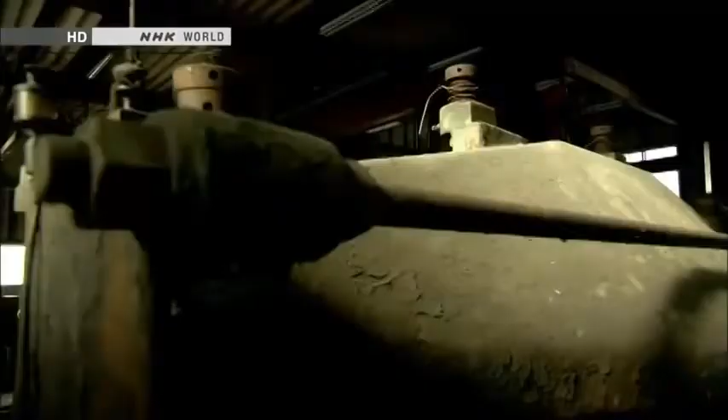In a workshop near Mount Fuji, a curious being has appeared. It's 3.8 meters tall and weighs 4 tons. It is a giant humanoid robot named Kuratas.

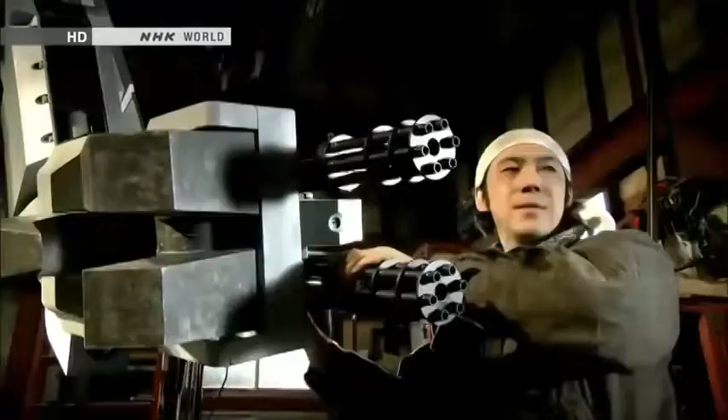Kuratas is a contemporary artist's creation. He holed up here for 2 years, building the robot with input from an expert.

He calls Kuratas a work of art, but it's a sophisticated piece of machinery. A person seated inside can control the robot, move its limbs, and grab things.

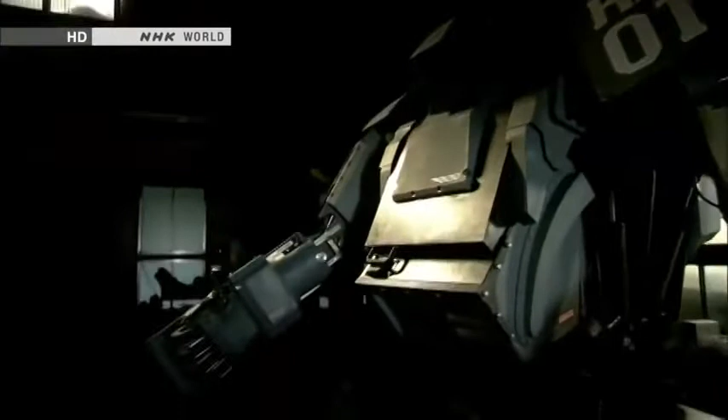The artist says he was inspired by robots in science fiction tales and animation. That vision sustained him as he worked in solitude.

Things that were once unthinkable are becoming real. How will robots evolve? Well, military applications could be one option. They'll probably become more and more like humans. They could surpass us in strength and ability.

People long dreamed of creating these extreme machines. Now, humanoid robots are here.

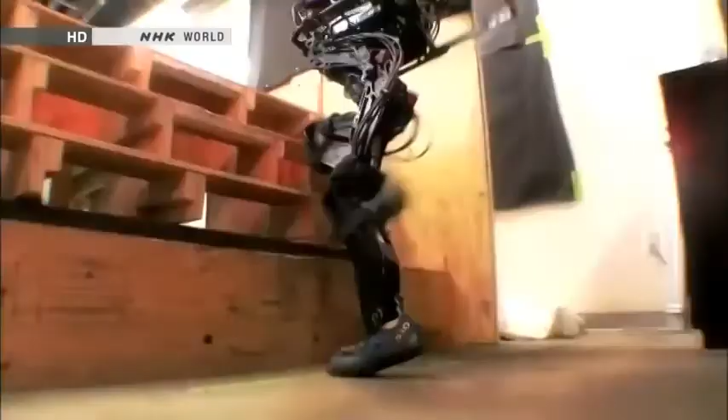They think like we do, move like we do, and even sacrifice themselves for us. We want our robot to change society, because robots must be useful.

Electronics and computing, progress in vision systems—there are many pieces of it. We will see much more capability continue to grow.

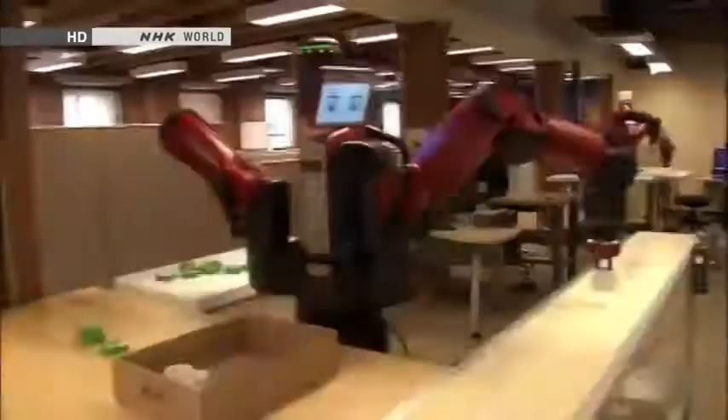Since the Industrial Revolution, people have entrusted some jobs to machines. But there may come a day when humanoid robots do much more complex jobs. Then, what will people do?

You'll see more and more robots doing things in society, whether it's manufacturing, service applications, or home healthcare applications. The key will be to skillfully divide labor between humans and humanoid robots.

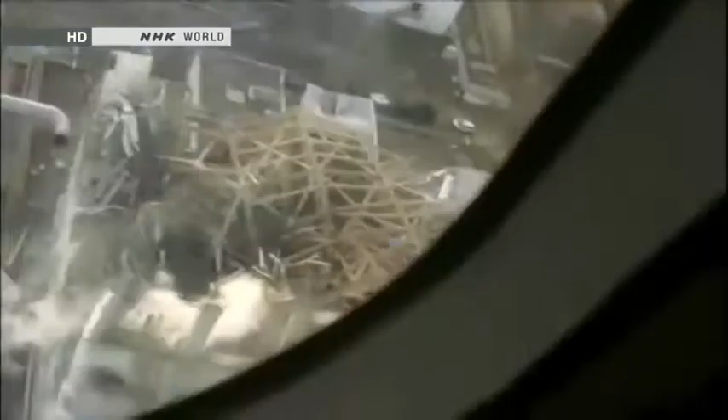The disaster that hit Japan in March 2011 accelerated efforts to develop robots with human traits. The Fukushima nuclear accident left people powerless.

Robots can take over when things become dangerous. They can plow through rubble, climb ladders, even make repairs. People are turning to humanoid robots to handle all of these tasks.

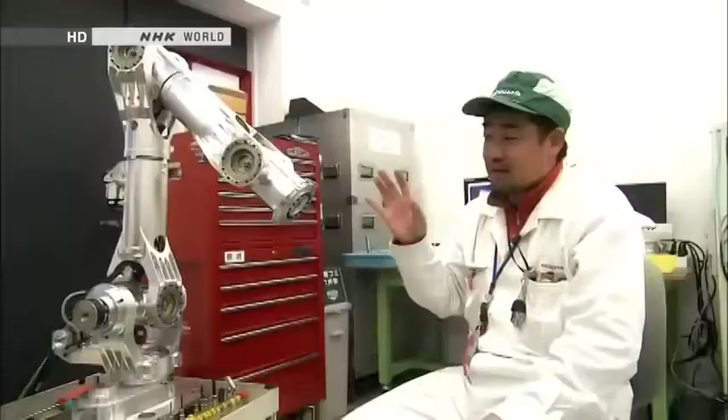We're eager to launch it soon to end the crisis. By joining forces, we can make a truly useful contribution.

Only a humanoid could do it. Or the day will come when robots will really assist mankind. The nuclear disaster in Japan sparked explosive advances in humanoids at the front line of robotics development.

This program explores the future that's fast approaching.

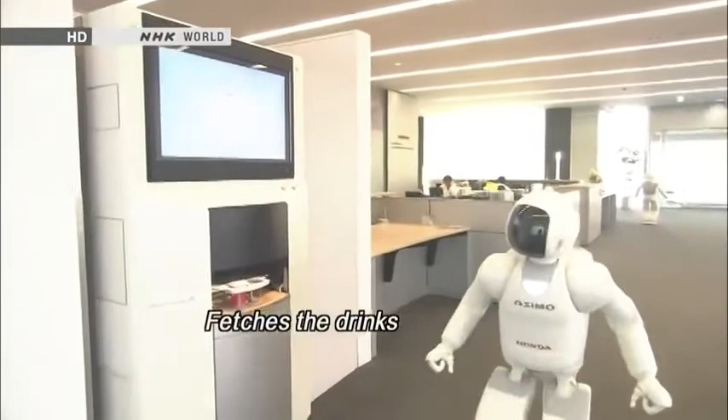ASIMO was created by Honda's research and development subsidiary.

We were allowed to film their top-secret robotics laboratory.

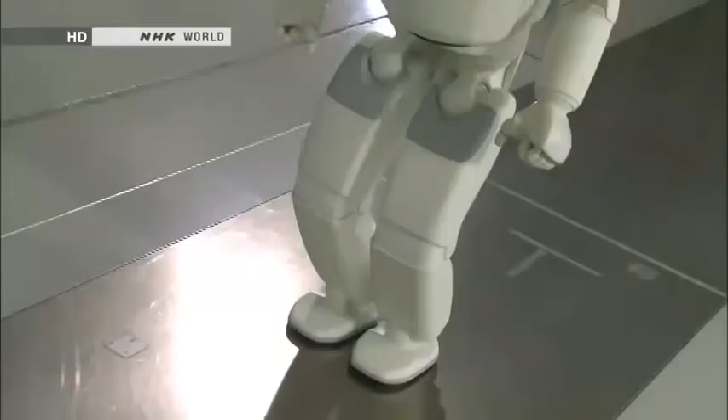Japan is a worldwide leader in the development of humanoid robots. ASIMO is the country's crowning achievement. Engineers continue to make improvements.

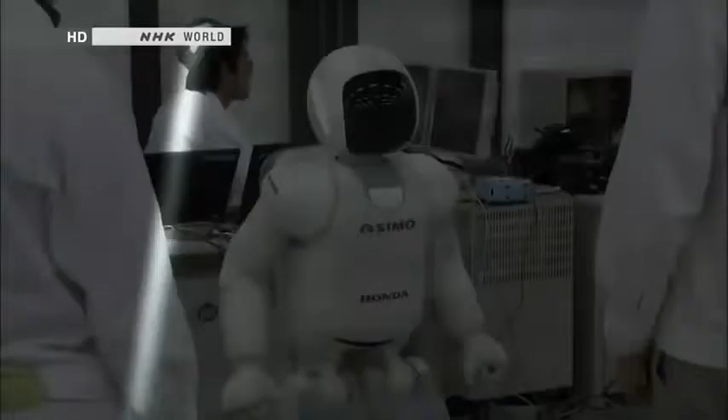ASIMO's most innovative feature is its advanced intelligence. The robot can think and act on its own without human intervention. That's made possible by sensors that replicate our 5 senses.

ASIMO's head contains 8 microphones. It uses them to listen and engage in conversation.

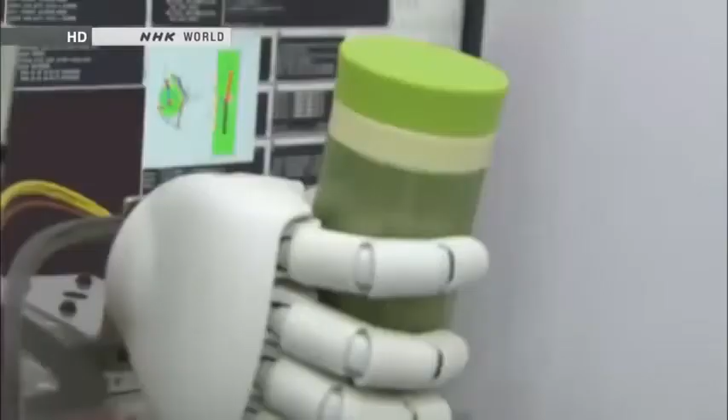ASIMO also has a sophisticated sense of touch. Its fingers can make subtle movements, like a person's. Sensors are embedded in the fingertips, too.

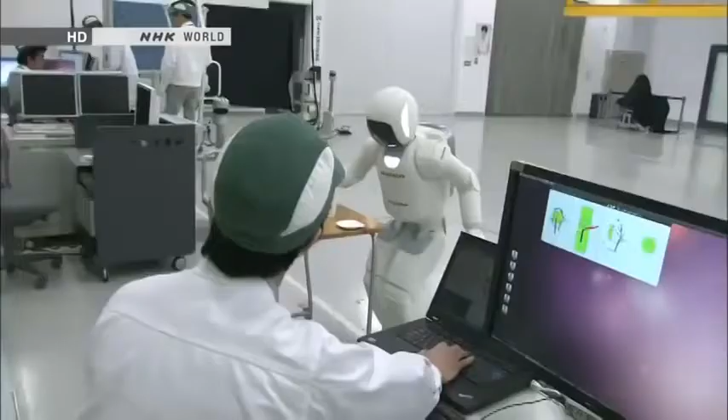They can gauge the hardness of an object, like human fingers do. Most robots use a fixed amount of strength to grab things. But ASIMO exerts more power to open a tightly sealed water bottle and less when holding a paper cup.

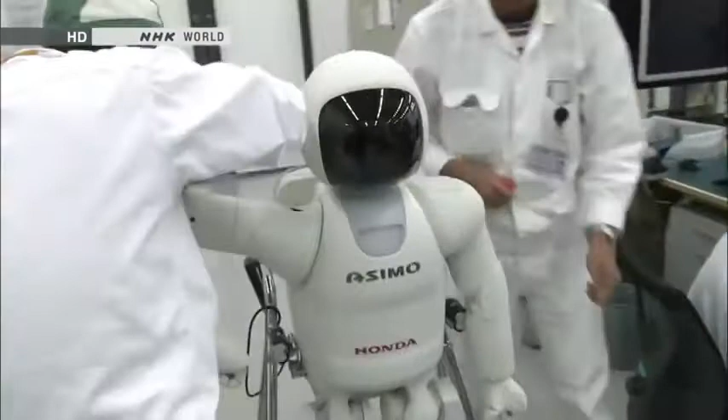Its artificial intelligence uses information from the fingertip sensors to adjust the grip. The developer's ultimate goal is for ASIMO to be a valuable partner that coexists with humans.

The engineers who created ASIMO all grew up watching animated shows about robots, such as Astro Boy, Doraemon, and Gundam. They dreamed of someday making their own.

Satoshi Shigemi is the development team's leader. He has been designing robots for the past 16 years.

From the beginning, we wanted to design a robot that could help people. To realize that dream, we're constantly asking ourselves, what kind of robot would be able to change society, make people happy, and make life easier for people around the world?

Our idea is to create a robot that will change how people live. We're working through the technological issues, one by one, in order to reach that goal.

ASIMO's advanced physical capabilities are revolutionary. The robot can walk and run. It can reach speeds of up to 9 kilometers an hour.

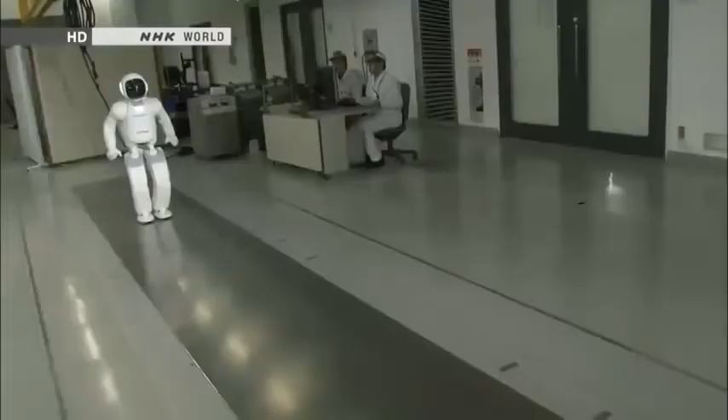For robots, walking is much easier than running. When running, both feet momentarily leave the ground. Balancing in mid-air is no easy task.

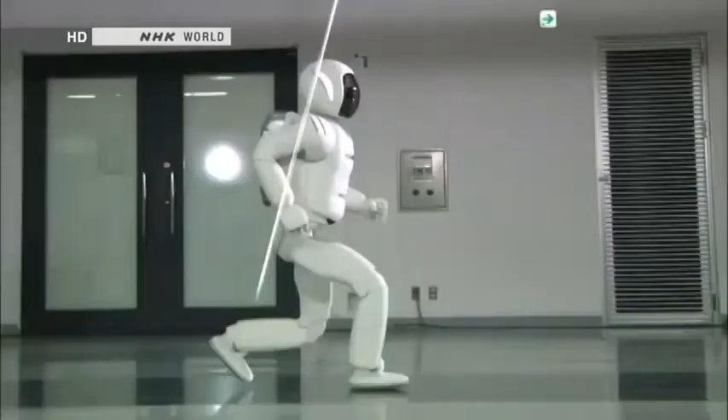Maintaining posture while jumping or floating in the air was a major technological breakthrough. ASIMO leans its upper body slightly forward to maintain overall balance. It goes forward straight in the air.

Sensors in ASIMO's waist measure the robot's angle. It leans slightly to compensate, forward or back, side to side. That's how it stays perfectly balanced in the air.

ASIMO has been evolving ever since development began in 1986, much like a growing child.

But something happened that made researchers realize ASIMO's real-world limitations. It was the accident at Tokyo Electric Power Company's Fukushima Daiichi nuclear plant. The damaged reactors released radioactive substances, making it difficult for humans to deal with the crisis.

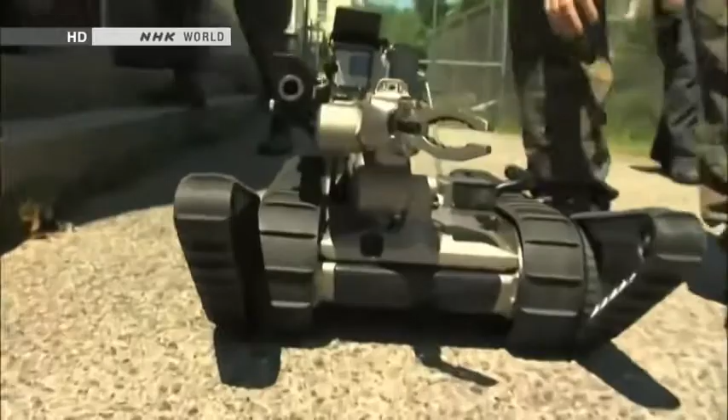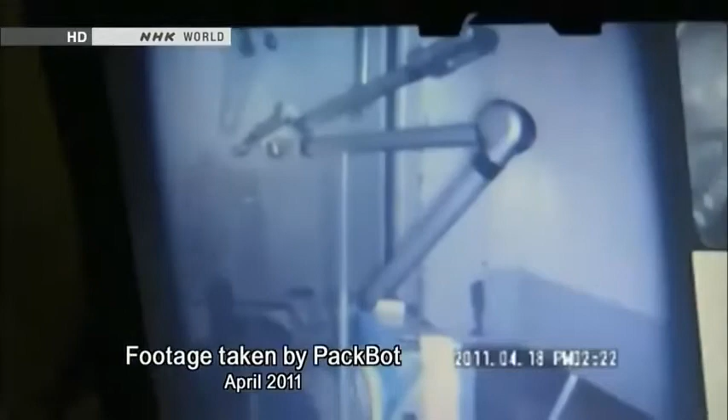People needed something that could confront the dangers and bring the plant under control. Robots. Japanese officials sent a request for robots developed by the U.S. military. The robots were sent to Fukushima in April 2011. They recorded images inside the damaged reactors.

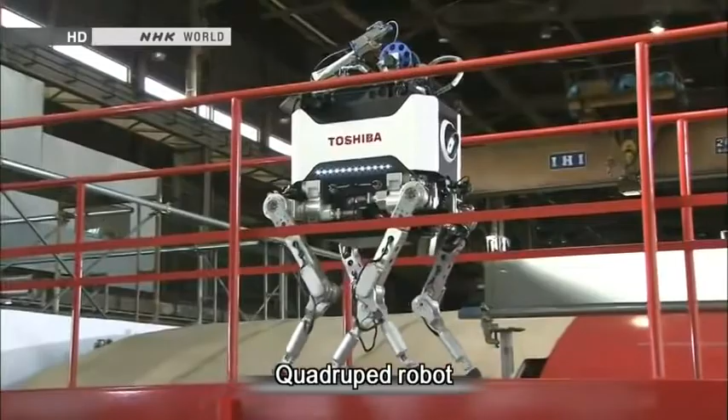Since then, a variety of Japanese robots have been enlisted as well. Robots have proven to be useful, but 2 years after the accident, they're only used for inspections. They're not able to do all the work of humans.

What about ASIMO? Right after the disaster, people flooded Honda with phone calls and emails asking the company to send ASIMO to the Fukushima plant. But ASIMO wasn't up to the task. It could move nimbly over an office floor and other flat surfaces, but large vertical gaps and obstacles were a different story.

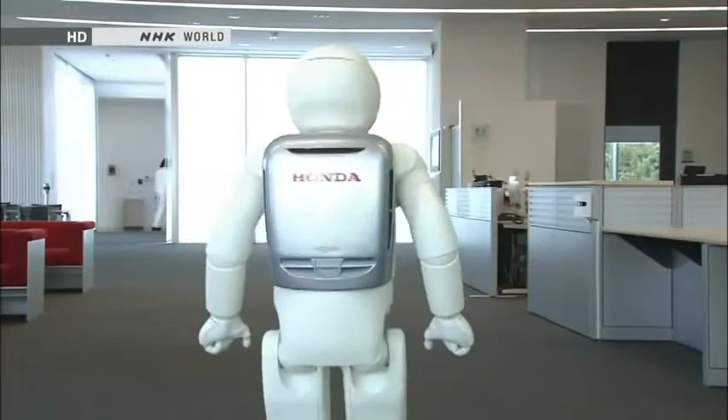We heard from many customers. We ourselves regretted that ASIMO couldn't be of help. It was obvious that the ASIMO we had built wasn't ready for real-life action. We realized right away that we needed to make something different, something new that could offer immediate assistance.

Honda wasted no time. Company officials offered to create a robot free of charge to assist TEPCO in the recovery. TEPCO accepted. Officials asked for a robot that could open or close valves inside the nuclear plant.

We wanted to flush out radioactive materials that remained inside the pipes and bring down radiation levels in the facility. That was our first goal. Unless we opened or closed the valves, the area would remain highly radioactive, and that would prevent workers from entering the facility and impact the entire decommissioning schedule.

How many valves are there? Each unit has from several thousand to tens of thousands of them.

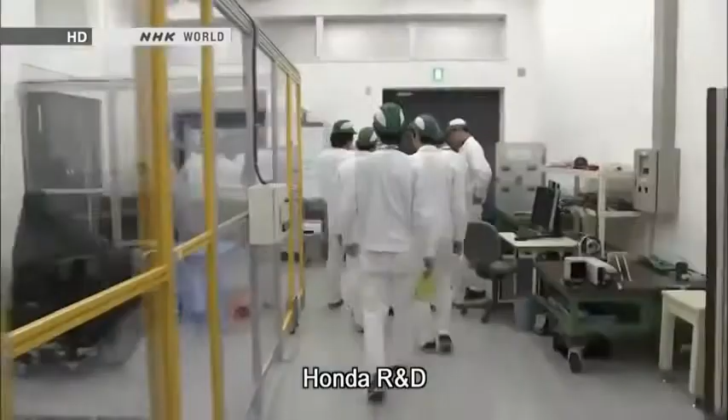In July 2011, 4 months after the accident, Honda began designing a robot for use at the nuclear plant. Members of the ASIMO team were put in charge of the project. A humanoid robot would take too long to build, so engineers focused on making a robot specifically for operating valves.

ASIMO was crucial to their efforts. Its ankles employ advanced balancing technology. Developers reasoned that using it would allow the new robot to work inside rubble-filled reactor buildings.

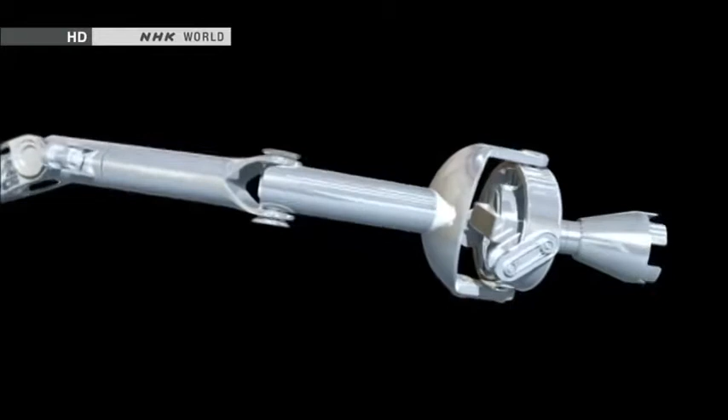The team worked exceptionally fast, completing a prototype in just 4 months. They turned ASIMO's leg into an arm for operating the valves. Even when the base moves, the arm remains steady.

So far, so good. Officials from TEPCO evaluated the prototype at the National Institute of Advanced Industrial Science and Technology. The government-backed group for cutting-edge research contributed to the development effort.

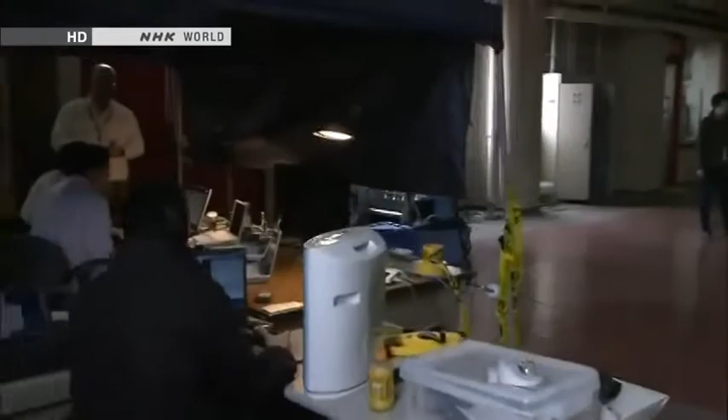A TEPCO official couldn't take his eyes off the robot's movements. We may be quite demanding. That's okay. We might be quite direct. The test is designed to replicate conditions inside the nuclear plant.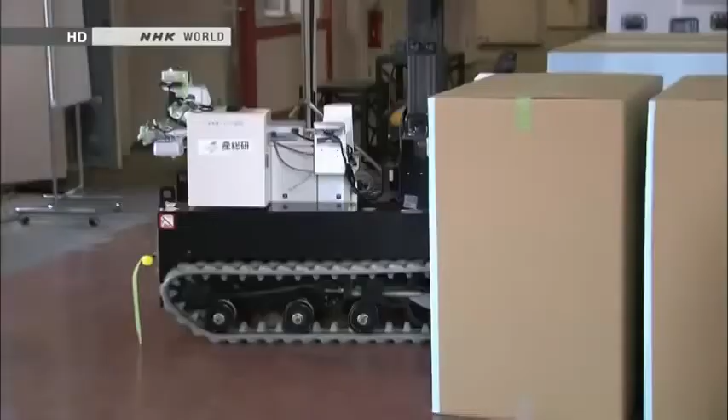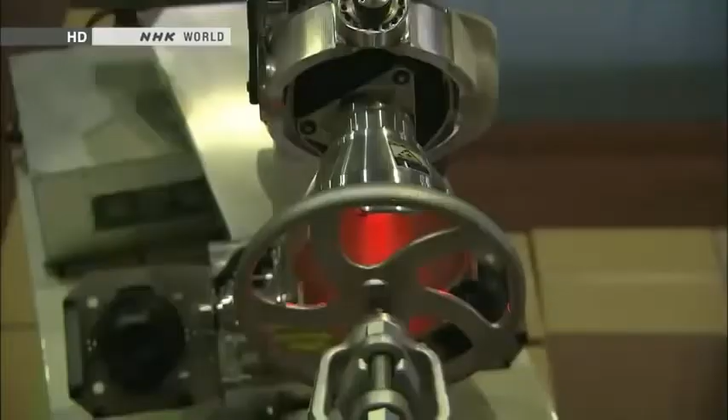The robotic arm is remote controlled. Testers send the arm toward one of the valves. There are a number of unknowns, including the condition of the valves. They may have rusted since the accident. A valve might break if the robot applies too much force, or it might not budge at all.

The robot uses just the right amount of force and turns the valve on the first try. It's passed the test. This robot can do more than inspections. It could help in the recovery effort.

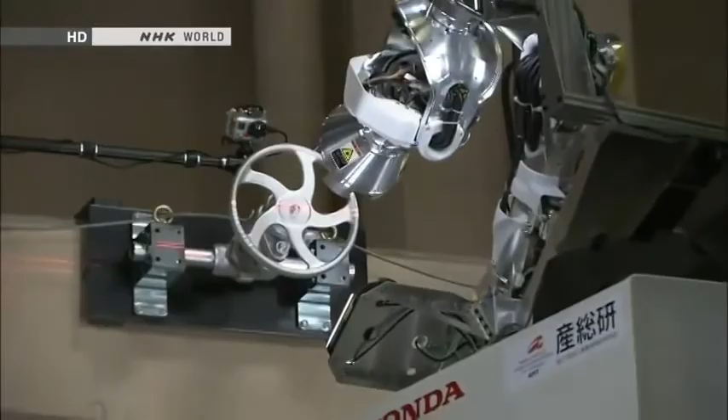From what we've seen, the robot seems near perfect. We want to use it as soon as the need arises. It's important that we quickly do what we can to make that possible.

The Fukushima accident also encouraged U.S. developers to design emergency response robots. Department of Defense officials have spearheaded the effort. Before, they had shown little interest in humanoid robots. Now, they view them as vital for disaster response.

The architect of the new strategy is Gill Pratt of DARPA. He oversees funding for leading-edge research at the Department of Defense.

There are many aspects of disaster response in Fukushima that inspire people in robotics to work on new capabilities. If they were able to take action during those first 24 hours, then the first reactor maybe would not have blown up, in an environment that is too dangerous for a person to do.

What's important to us is that the robot is compatible with human environments, compatible with human tools, and also compatible with human operators without special training. As a result of that, the easiest form that comes to mind is the human form.

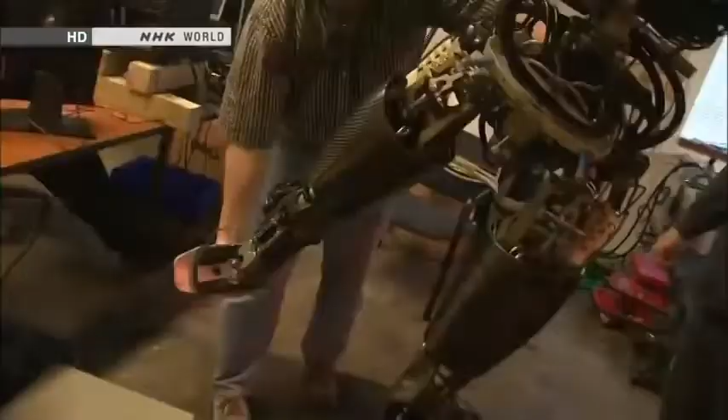This is the first American-made humanoid robot for disaster response. It's called Atlas. Before, U.S. designers had focused on robots with specialized functions.

Why the sudden interest in humanoid robots? Traveling over debris, prying open valves, using tools for repairs—performing multiple tasks like these is impossible for specialized robots. Crises also require robots that can navigate doors and stairs. Humanoid robots are ideally suited for such situations.

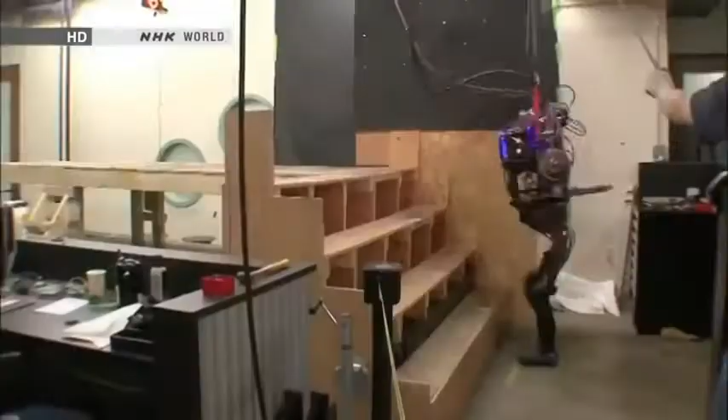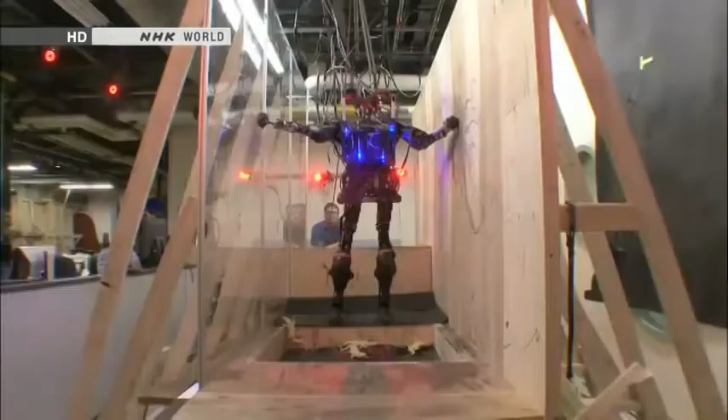Tests of this prototype were going smoothly. It can easily climb stairs and jump from a height of nearly a meter, and can negotiate obstacles using its arms and legs. It can already handle more demanding environments than Asimo can.

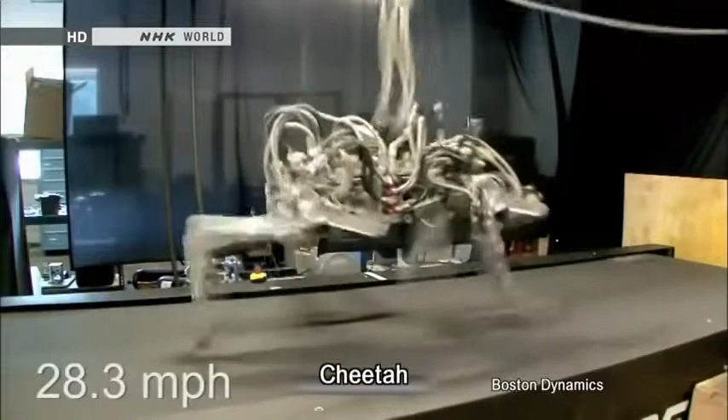Atlas is loaded with technologies originally designed for military robots. A quadruped robot called Cheetah can race through a battlefield at 45 kilometers an hour. LS-3 is for transport—it can carry heavy supplies for soldiers.

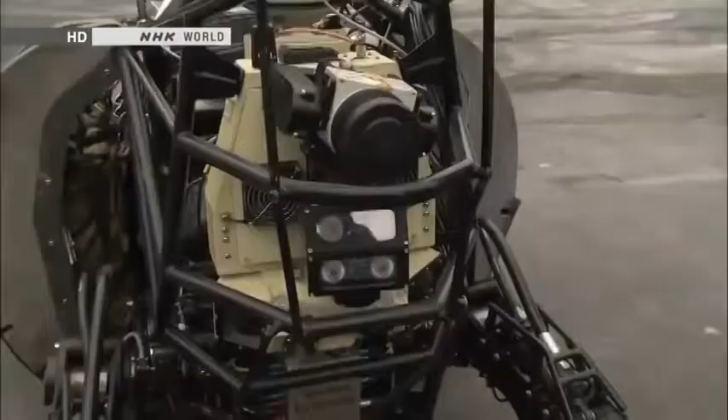The ferocious-looking robot gets its strength from a powerful hydraulic drive system. A hydraulic device can be small, yet quite strong. The black cables convey hydraulic power to the legs, generating the brute force required for harsh conditions on the battlefield.

A web of hydraulic cables covers Atlas's body, forming a muscular suit of armor for clearing debris.

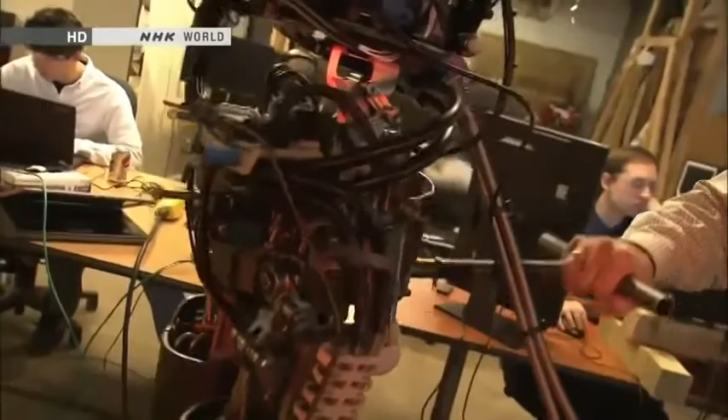Another important technology comes from military robot engineering. This machine's joints have a wide range of motion, allowing for flexibility that humans can't achieve. Atlas's joints are capable of moving in 28 different ways, letting it crawl through narrow spaces and withstand sudden shocks.

Then we have the knee. This has 3 in the hip, just like us—this way, and then this way. I am very impressed with the number of degrees of freedom. It will be able to do these human-compatible tasks without a lot of the limitations that other robots have.

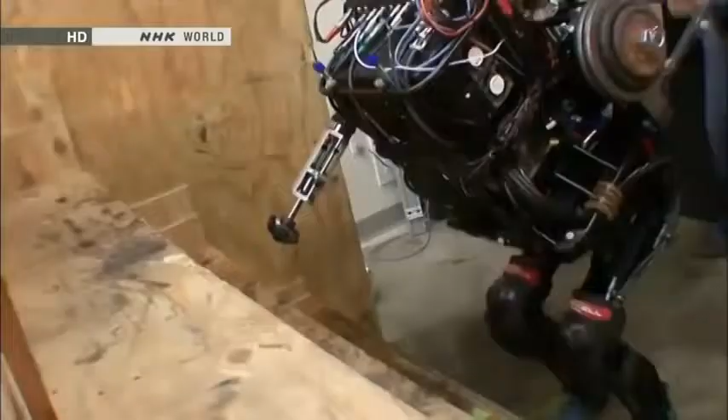Engineers will combine Atlas's rugged body with sophisticated artificial intelligence that's almost near completion. They aim to complete the robot by December of next year.

One reason you see humanoid robots is because there's some people working who are really interested in robots as an entertainment thing or as a performance thing. I think that's different—we're much more interested in basic capabilities for emergency response, rescue. So I don't think Asimo has been designed to do those things yet.

U.S. engineers stepped up their efforts to develop humanoid robots after the nuclear accident in Japan. Japanese researchers are embracing the same mission.

In November 2012, robot engineers from around the world gathered in Osaka for an international conference on humanoids. Gill Pratt from DARPA was one of the participants.

He came to invite engineers to join a project sponsored by the U.S. Defense Department. On March 11th, after 24 hours, if only a robot had been there to go and open that valve, the entire disaster could have been averted. But we didn't have one, and furthermore, we didn't have anyone that could do the job. So shortly afterwards, we actually started planning the DARPA Robotics Challenge.

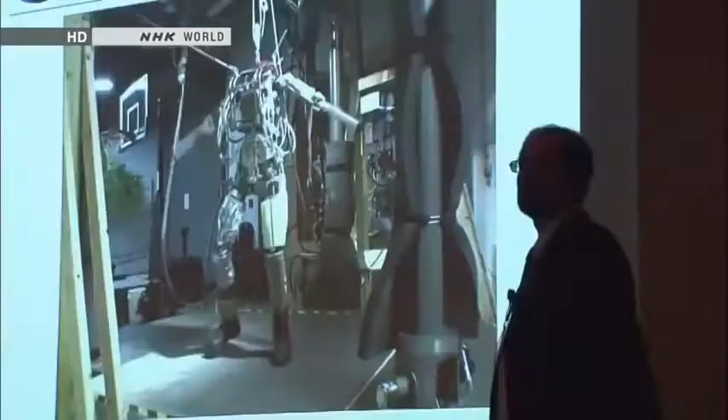They have 2 degrees of freedom, not 1. The Robotics Challenge is a competition to develop emergency response robots for major disasters like Japan's.

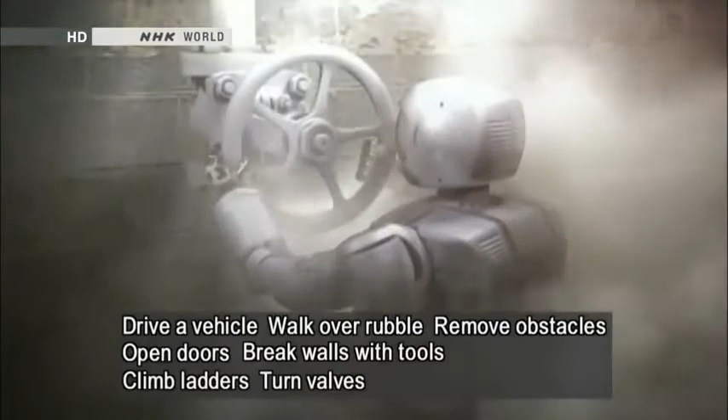The challenge consists of 8 tasks: driving a vehicle to approach a disaster site, walking over rubble, removing obstacles, opening doors, using tools to break down walls, climbing ladders, turning valves, and making repairs.

A single robot must complete all 8 tasks. The development period is 2 years. DARPA will provide contestants with funding of up to $4 million.

DARPA has received over 100 proposals from research groups worldwide. They include renowned organizations like NASA and MIT.

Japan is at the forefront of humanoid robotics engineering, yet its researchers hesitated to throw their hats into the ring.

So actually, to me, it's difficult not to see that some of the results of the DRC are going to be used to advance, as you say, advanced military technology. The DRC is about developing robots that I believe wholeheartedly are completely impractical for military purposes, for offensive military purposes.

Will the technology that we come up with find its way into military systems? Probably yes. But I guarantee you that if you work on a robot for healthcare, there's a chance that that technology will also find its way into military systems.

The members of one Japanese research institution wanted to take part in the competition.

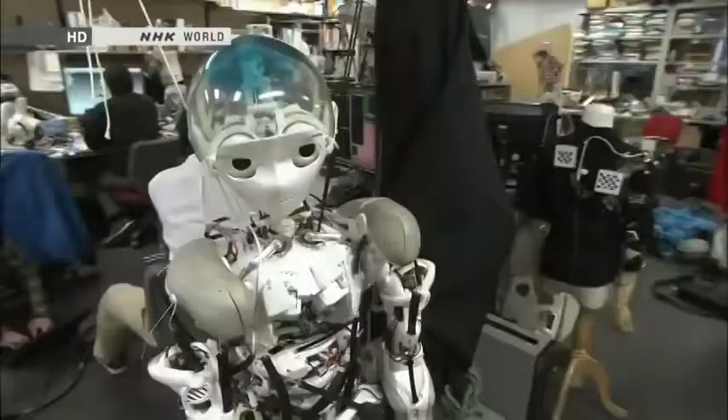They worked at the University of Tokyo's robotics lab. Researchers there, along with those at Honda, are global leaders in robotics engineering. But they faced a major obstacle to competing: the university bans military-funded research.

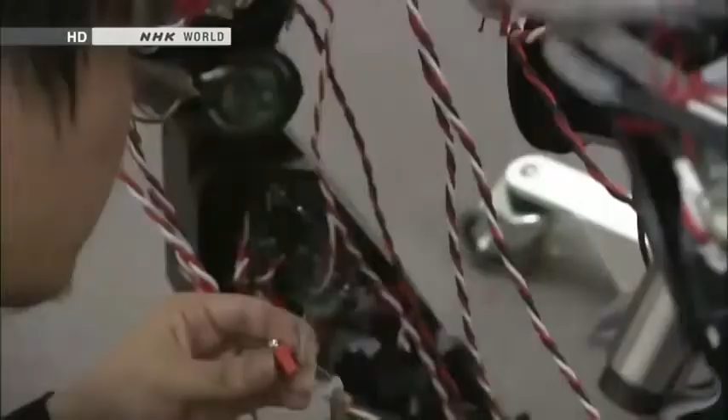Three researchers made a decision. They told the university they were leaving, then decided to set up a venture company and enter the DARPA Robotics Challenge. They couldn't shake the feeling that they should leave their quiet university lab and help resolve the nuclear crisis.

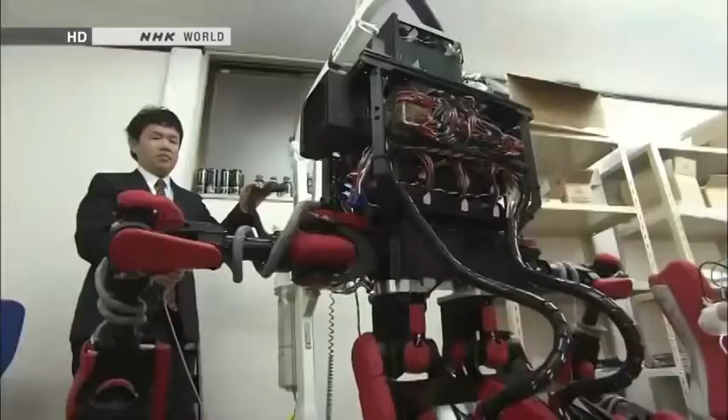Six months after launching their venture, the team had just completed a prototype with help from university graduates. Its long arms can exert 10 times more force than those of conventional humanoid robots.

It's too tight to turn with one hand. It can easily turn a valve that's too tight for a person to turn. The strong force comes from a large electric current that pushes the motors to their maximum limits.

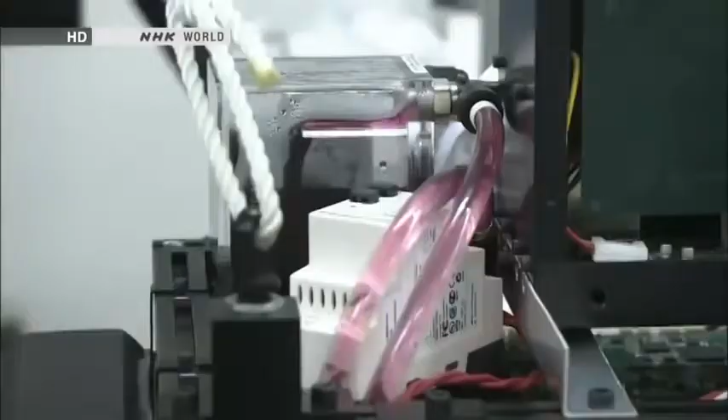A reddish fluid circulates through the robot's body. The fluid serves as a coolant that keeps the motors from overheating. The cooling system should enable the robot to perform hours of grueling work at disaster sites.

The time has now come for the developers to apply their years of research to the real world. A nuclear crisis has happened here in Japan. Radiation is escaping. Researchers in every field must wonder at least once if the technology they've been working on could help resolve the crisis. By joining forces, we can make a truly useful contribution. It's with this in mind that we decided to enter the competition.

One country is quickly catching up with Japan in humanoid robotics: South Korea. KAIST is a government-funded lab for the advancement of science and technology. Researchers there were among the first to express interest in DARPA's robotics challenge. This humanoid robot is called Hubo.

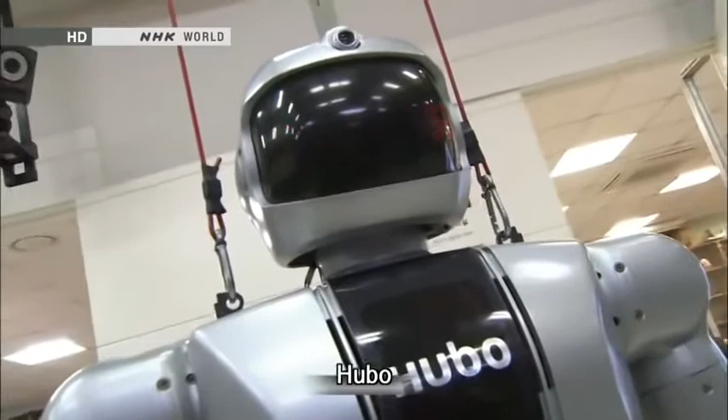It's modeled on Asimo, which Honda spent 14 years developing. Hubo was built in just 5 years. Hubo deftly manipulates its hands, and it's also good at dancing. Its moves look just like Asimo's.

Hubo has been undergoing a major upgrade ahead of the competition. It can now bend backward at the waist while walking to handle all kinds of environments. It can quickly pick up tools. The tests were going well.

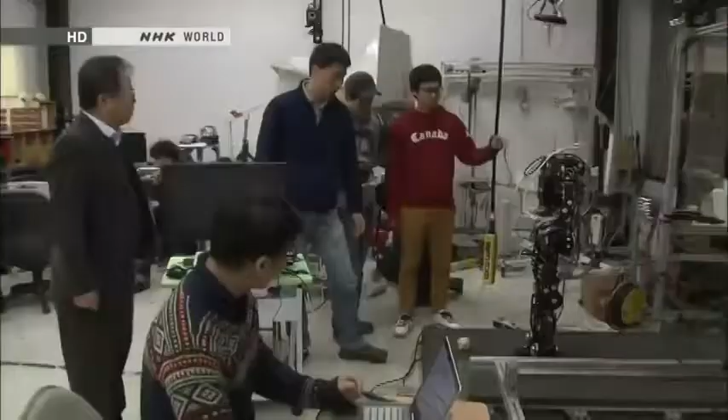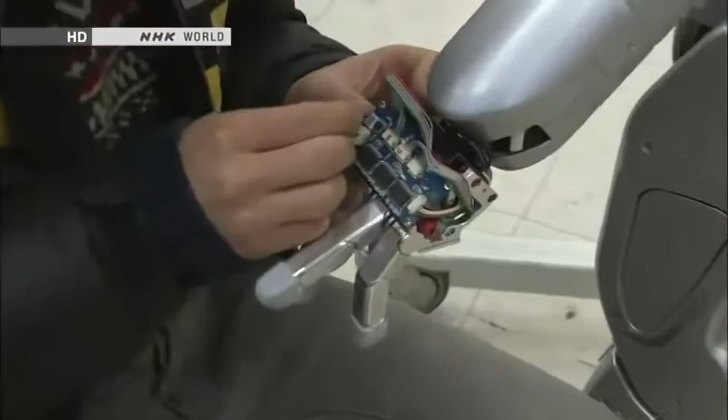People have always compared Hubo to Asimo. Engineers now had a strategy to get ahead of the Japanese developers. They decided to publish certain details about Hubo's design and pursue joint development with researchers at other institutions. One could say that this space inside Hubo's chest captures the heart of their thinking.

It's empty now, but this is where artificial intelligence will be installed. It's removable. Hubo does not yet possess artificial intelligence. Its motions are as sophisticated as Asimo's, but Hubo's movements are all pre-programmed.

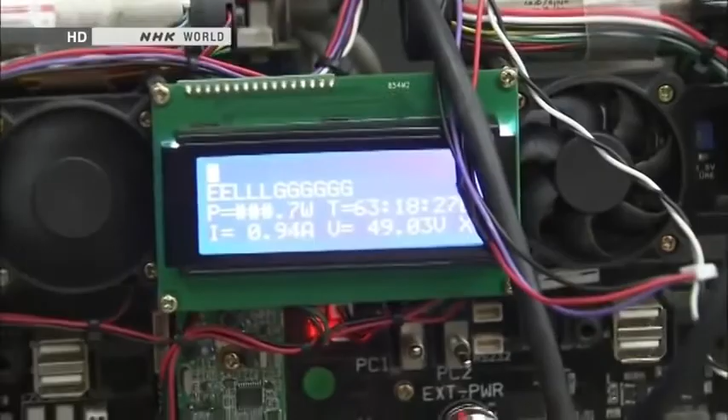U.S. universities that lead research into artificial intelligence will develop a brain for Hubo. The stage has been set for a joint U.S.-South Korean team to compete in the DARPA Robotics Challenge.

Sharing is the key to making technological advancements. That's true in South Korea and in other places too. Research shouldn't be confined to one place. People developing humanoid robots elsewhere are too close-minded.

Researchers at Honda were also invited to enter DARPA's competition, but they declined. Their energies were focused on designing a robot to tackle Japan's nuclear crisis.

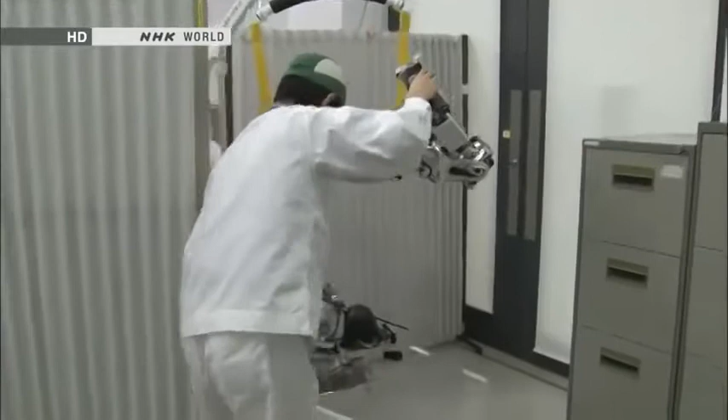Nearly a year has passed since Honda's robotic arm passed evaluation tests, but the device has yet to be deployed to the nuclear disaster site. That's because officials at TEPCO requested a change in specifications.

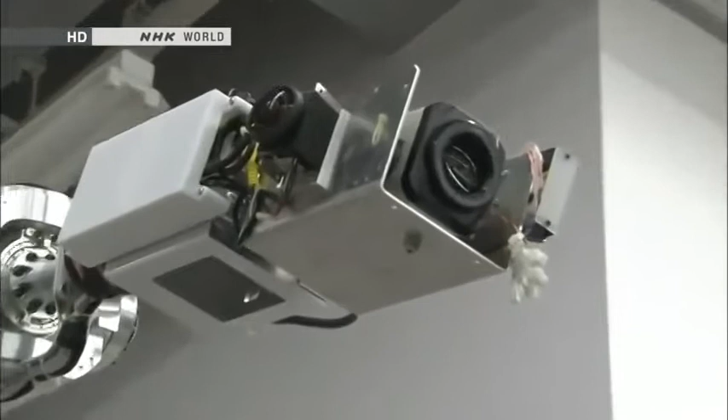Engineers have replaced the valve-turning hand at the end of the arm with a camera. TEPCO had changed its plan. Officials decided to put priority on assessing conditions inside the plant's facilities. They said it was too early to have robots work on valves.

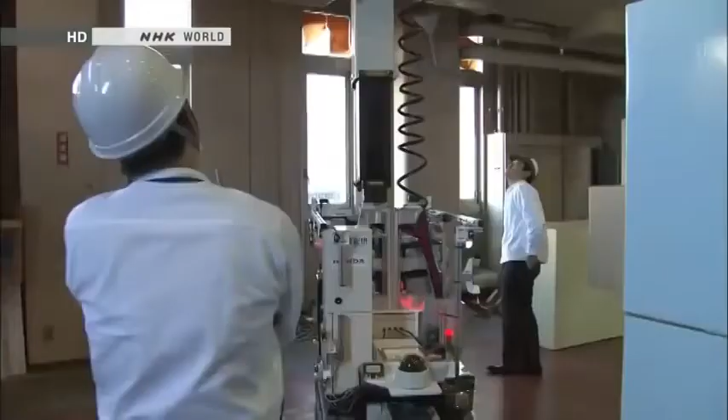The robotic arm will soon be sent to the accident site. It will provide the first images filmed from high up. The robotic arm was not the end of Honda's efforts. Its engineers had another secret mission.

They would develop a new humanoid robot, an updated version of Asimo for use in disasters. The site where the Fukushima disaster took place is dark and off-limits to humans. Only a humanoid robot with both intelligence and motor skills could climb over the debris, get to the accident site, and perform the work of people. In other words, a robot like Asimo.

Let's use our skills to make a humanoid robot that can tackle disasters. Asimo's engineers were united by this idea. The robot they envisioned would not only walk, but also use its arms to crawl. It would use every means possible to reach its destination. A dramatic update would be necessary.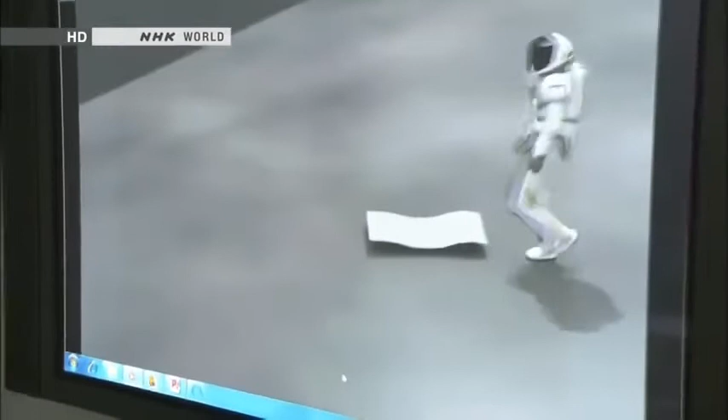A disaster reduction robot would be useless if it couldn't get to the site. It's important to get to the scene no matter what. Disasters create all kinds of debris that crumbles easily or breaks when stepped on. It's because it's dangerous that robots replace humans. That's what makes them valuable. A robot that couldn't get to the scene would be totally useless.

Honda's engineers began developing robots in 1986 with the goal of making people happy. 27 years of research is now being put to the test. As we saw in the Fukushima Daiichi crisis, the bottom line is that robots can stand in for humans in places that we can't go to or that are too dangerous. I am committed to delivering what's needed, when needed, in the shortest amount of time.

The accident in Fukushima spurred the development of humanoid robots around the world. The disaster also prompted people to question the roles of humans.

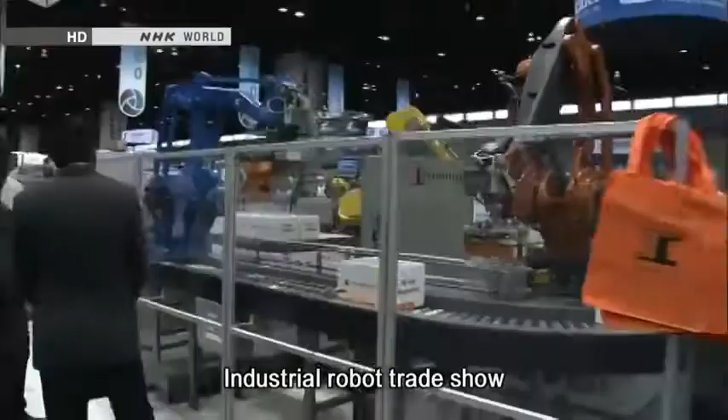One of the largest trade fairs featuring industrial robots took place in January. Global manufacturers displayed their latest models. Companies are developing more and more two-armed humanoids for industrial use. One new product at the event caught a lot of people's attention.

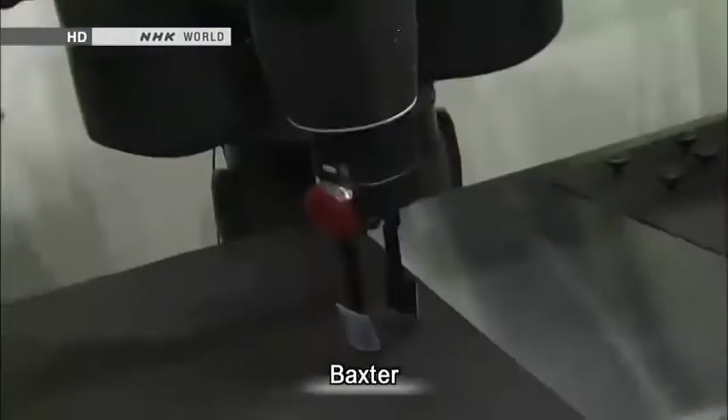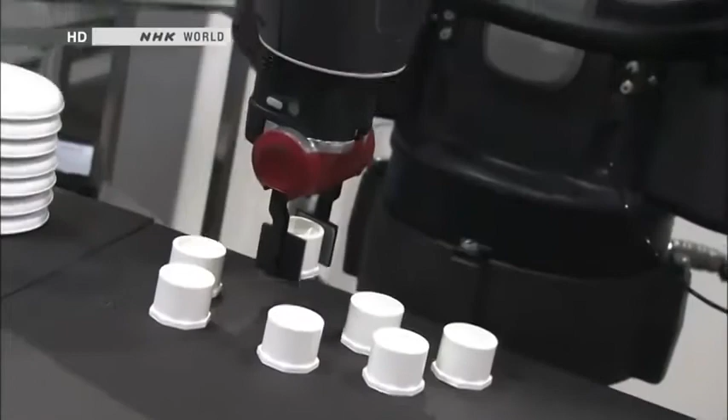Baxter was created by the inventor of a best-selling cleaning robot. It's equipped with sophisticated artificial intelligence. Baxter is designed to work side by side with people in factories and other settings.

The robot's most unusual feature is its ability to master a task in a matter of 5 minutes. All that's required is step-by-step manual instruction. No complicated programming is needed.

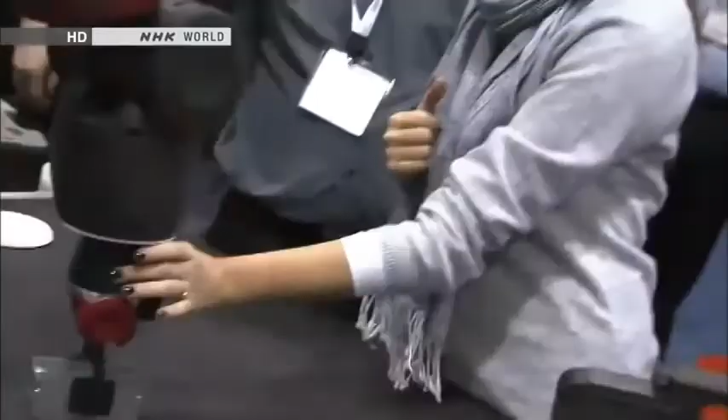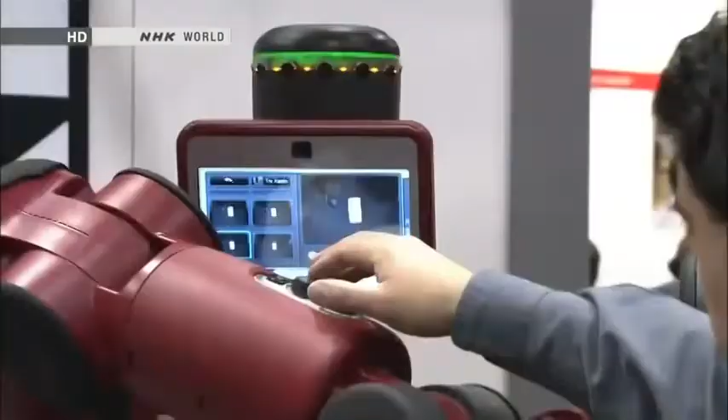The expression on the face on the LCD screen shows whether or not the robot has understood the task.

Baxter costs $22,000, a bargain for a humanoid robot. The maker says buyers can recoup their investment in several months and slash labor costs. I'm very impressed with it. I work for a small manufacturing company, and we have some older employees who are looking to retire, and there's some tasks that Baxter could do for us very effectively. Plus, it would be cheaper than employing a person.

It's not going to get tired. It's not going to need to stop. It'll keep running while everybody else is taking their lunch.

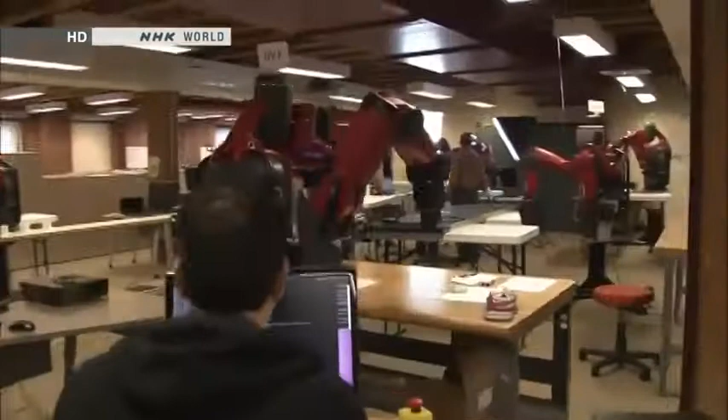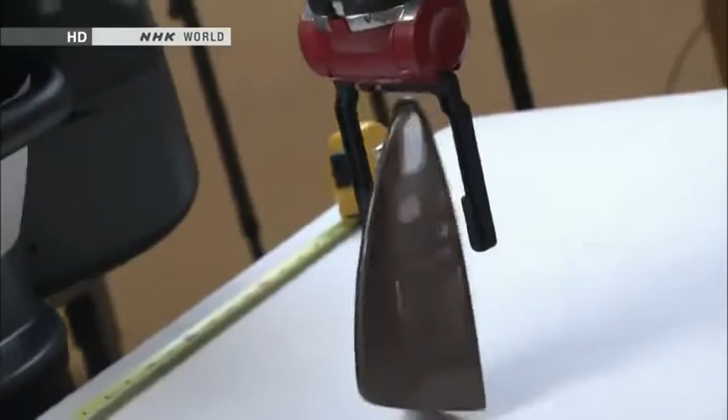The Boston-based manufacturer has a flood of back orders. Officials say someday Baxter will work at places like coffee shops, taking orders and grilling burgers. Eventually, they expect to have 500,000 U.S. customers.

Today we're focused on manufacturing, and there's a very big opportunity in manufacturing, but there's lots of other places that a robot like Baxter could go. We had the Industrial Revolution at the turn of the last century. We've just gone through the computer revolution, effectively at the turn of the most recent end of the century. We are now into the robot revolution.

Will people and robots someday compete for jobs?

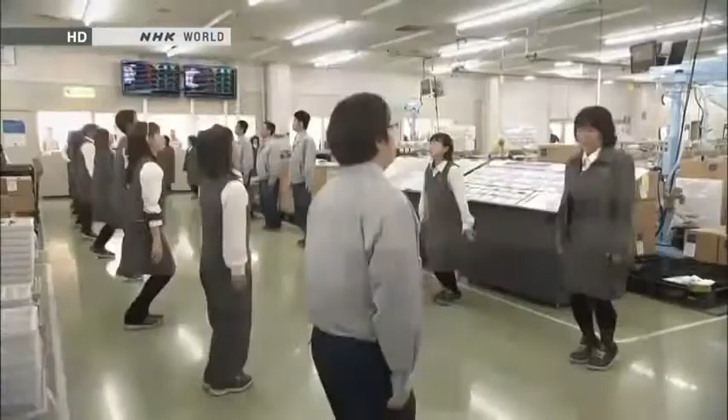At 8:30 one morning, a group of new employees takes part in daily morning exercises. They are 13 humanoid workers called NEXTAGE. This company began using the robots in earnest last year.

They have 2 eyes and are just like humans. They're cute!

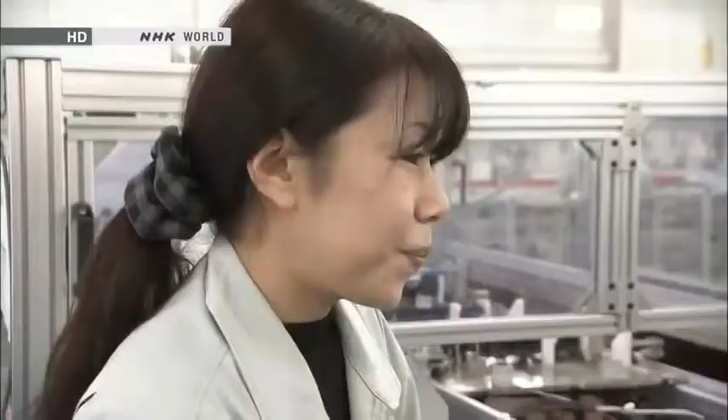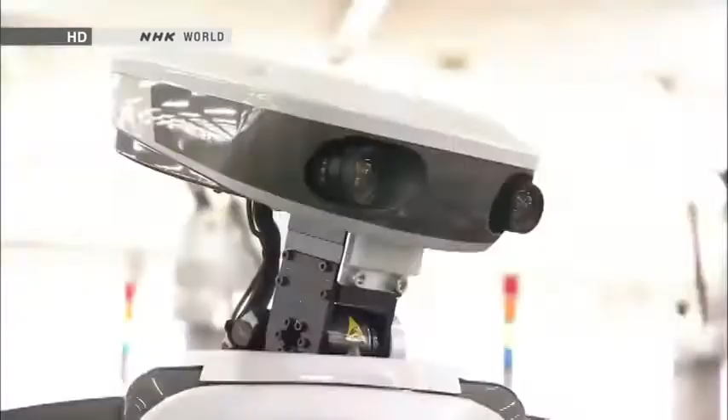This factory manufactures money sorting machines for cash registers. The humanoids work on a production line that was previously manned entirely by humans. The robot visually confirms the parts set in place by a human worker, then it begins its task.